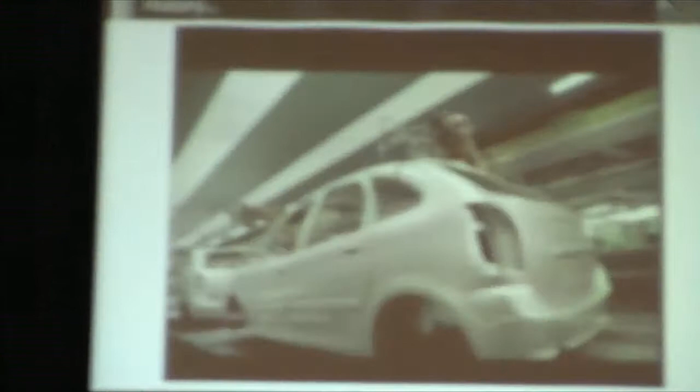Then, of course, we had the boom in robotics, the Industrial Revolution, or the second Industrial Revolution one might say, where robotic devices were introduced into the manufacturing process, and they were very successful. It was a very good marriage because the environment was very straightforward, very planned. The cars move forward always in a very organized fashion. One knows every time where every object has to be, so the robotic devices can be programmed exactly to move to the right point when required.

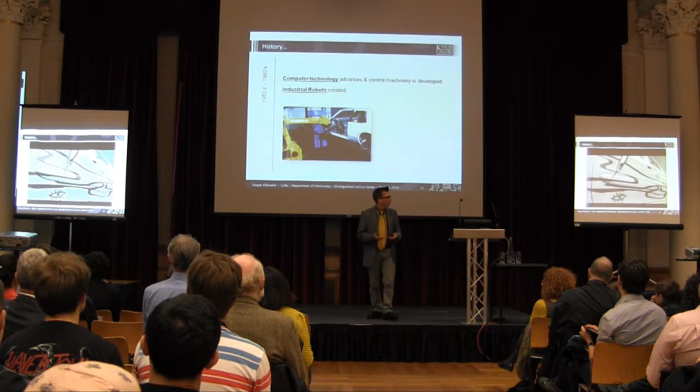I'm showing this video overlaid on the left and the right to again show that's not the way it is. These robotic devices, you might want to call them intelligent, work in the manufacturing industry, but they cannot do that. Here we get the impression that this robot is actually able to understand the human, is able possibly even to read his mind, and is a painter, painting a car, and then sneakily in the right moment erasing all traces again.

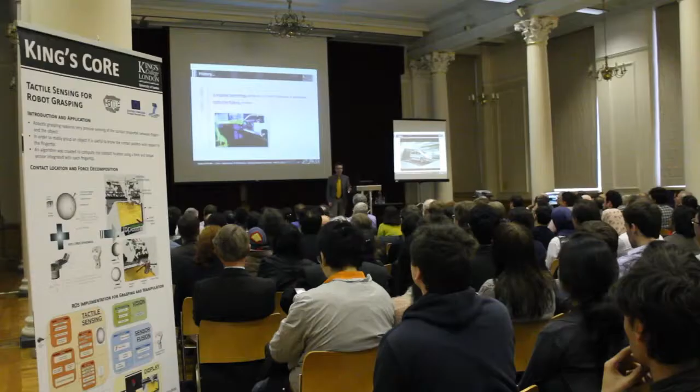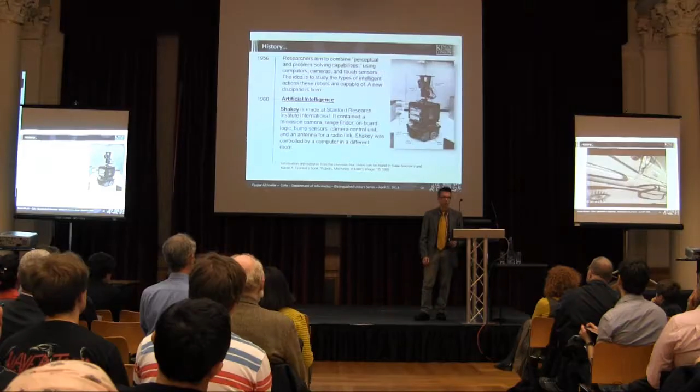So in order to achieve a video like this, either it has to be fully programmed step by step, or maybe it's all computer manipulated. The manufacturing industry is still working according to these earlier principles, like from the 50s and 60s. Everything is planned, and this way one can build cars.

But moving forward, there was then a move towards improving the intelligence of robotic devices—not only programming them step by step, but making them more intelligent. So artificial intelligence was introduced, and the first kind of robotic devices were developed. The idea was you take a computer, and the computer will do all the processing, possibly based on input that comes from sensors or other sources, and once the processing is done, the command will be sent to the robot.

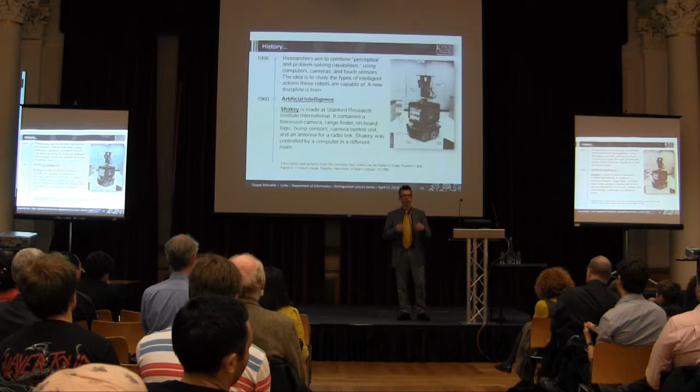So really, still really a complete planner, a complete decision-making process, completed and then executed. The problem is, if something goes wrong, if the environment changes, everything has to be planned again.

So there was then this new movement, very much supported or initiated by Rodney Brooks, who said, okay, we need simpler devices, robotic devices that have everything on board and that can react to the environment straight away. Instead of complicated models of the world, one should use the world straight away to carry out tasks. So simple robots, simple behaviors to be integrated in these devices, so that they could sense the environment and react to it, carrying tasks out.

And that comes under the heading of embodiment—trying to link the brain, this artificial brain, very closely with the sensors on one hand and the actuators on the other. So, simple behaviors. I want to show now a number of examples that illustrate this kind of concept.

Even in 1950, Alan Turing said, if you want to create a kind of artificial device that should behave like a human, then you should give it the best sensors you can, teach it like a child, and then you have the chance to actually develop this kind of intelligence. Rodney Brooks moved this a bit further and said, it's not just about speaking, but also about acting. So if you have a device integrated with all the sensors and actuators, and you let it loose in the environment, it will be able to learn, react, and do appropriate things in the environment.

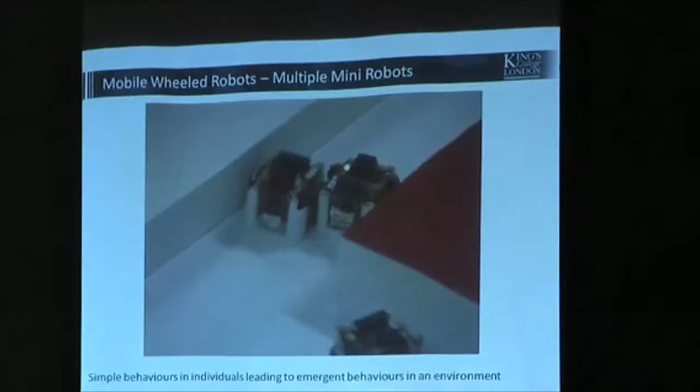So here on your left-hand side, simple behaviors like following your goal and avoiding obstacles actually create quite complex behavior if put into the environment and if the robots are in connection with others. On the other side, you saw behaviors like following a parent. So many things can be achieved with very simple behaviors.

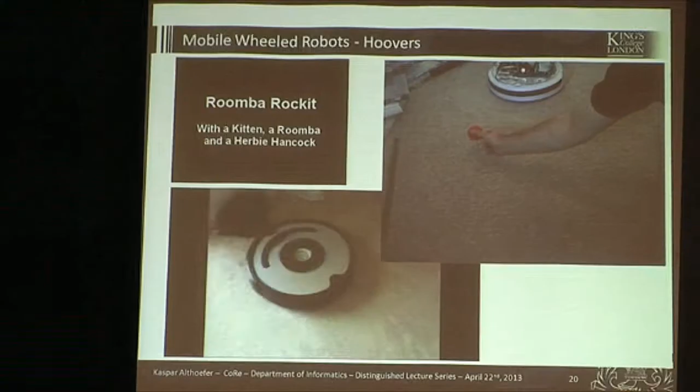Also, modern psychology recognizes that the brain is not just functioning by itself, but it is functioning also with respect to what the body is doing. So what your body is carrying out, what muscles are doing, that has feedback, has impact on your brain. I want to move on now and give more examples that underline the point even further.

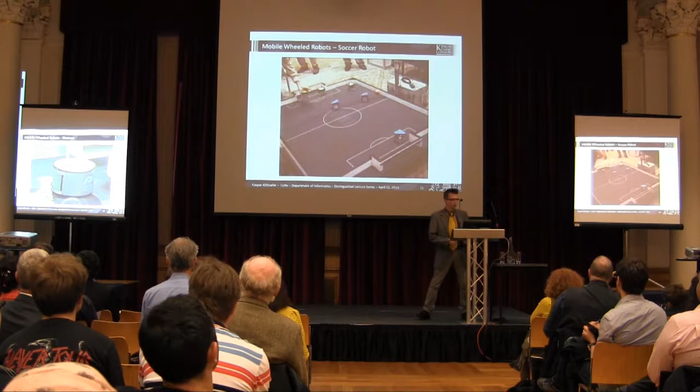So, for example, football, robot football, robot soccer. You can see here these robotic devices, they have simple behaviors built in, behaviors that are appropriate for football, so they have to defend, they have to attack, and they do sometimes very strange things - now they are just blocking each other, but it is appropriate in the environment because they keep the attacker away from the goal. Sometimes they have strange spinning maneuvers and you think what will this help, but occasionally it happens that the ball comes towards them and is then moved forward into the goal.

No goal in this game, unfortunately, but we have another set, a more modern approach to robo soccer. So we have slightly advanced robotic devices, they have slightly advanced behaviors, and they have also a leg now that they can use to actually shoot the ball, and very easily can score.

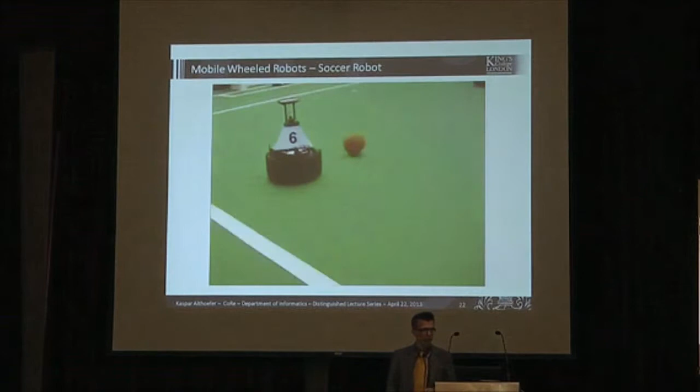I think in the first few sequences, a few goals are achieved very quickly, and you wonder what the goalkeeper is doing, but a bit later I think he wakes up and he's actually quite good in defending, as we can see here.

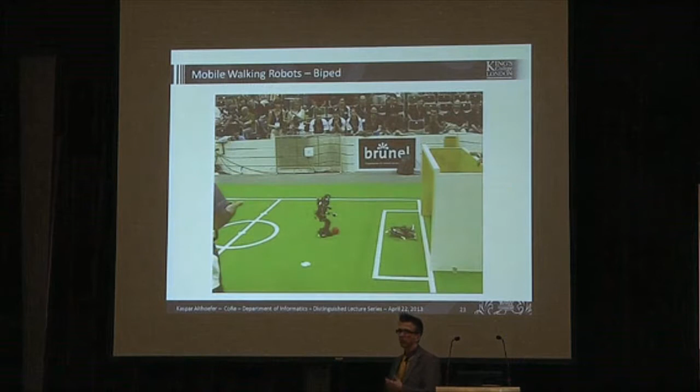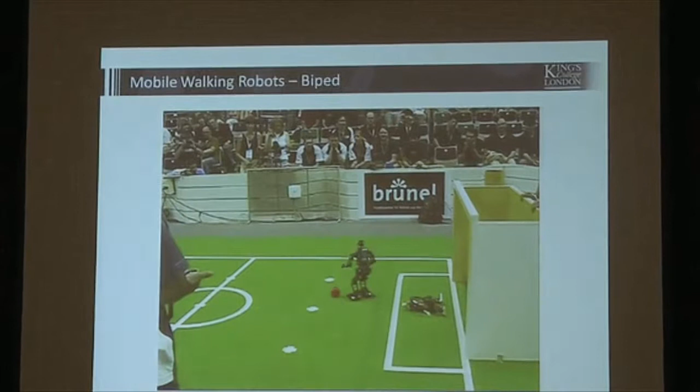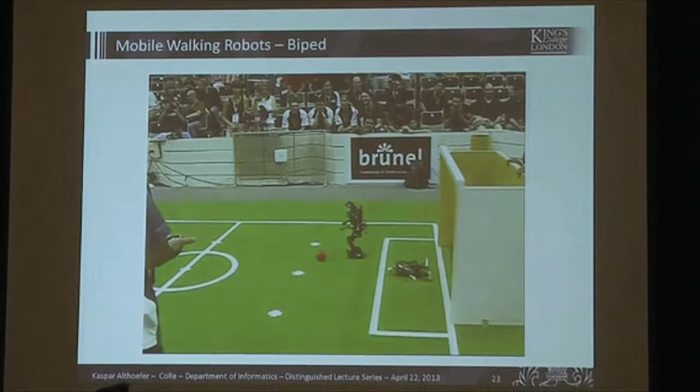Now, moving forward, what is happening there? So we have now even bipeds, two-legged robots that try to play football, and you wonder what's happening at first to the goalkeeper. Maybe that is part of the strategy, we don't know. But now watch the other player - he gets confused very easily, but the interesting thing is he always finds the ball again and orientates itself towards the ball and tries again to maneuver the ball into the goal.

You can also watch the people in the background, they are very tense now. And as you can see, the player is trying again, and he comes up with a very interesting solution.

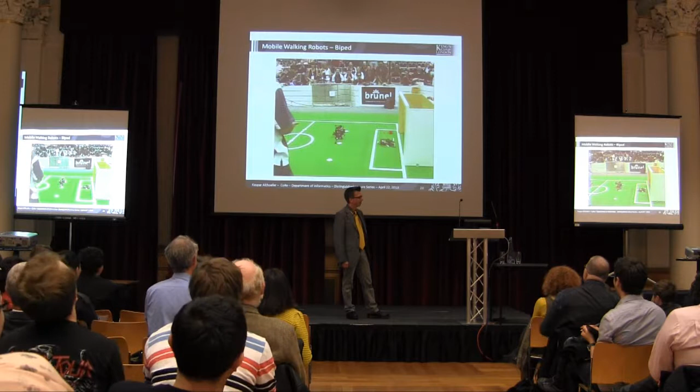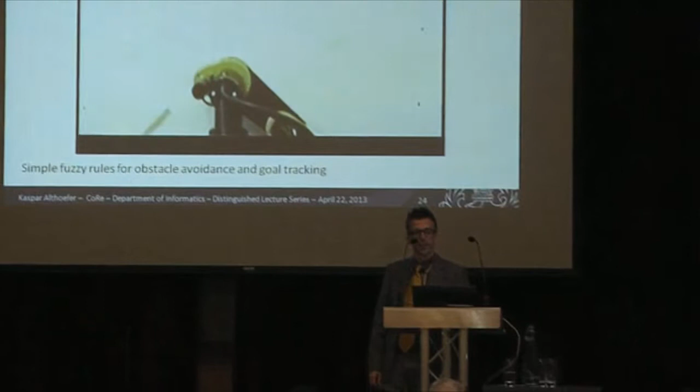Okay, so now I have the opportunity also to step back a bit to work that I have done here at King's actually 15 years ago, so this was part of my PhD. So trying to also take this idea further and to program simple behaviors into a manipulator.

So instead of - the idea was to move it a bit further and to use fuzzy control or fuzzy logic to describe these behaviors. So very simple behaviors like, if the obstacle is on the right, move to the left. If the obstacle is on the left, move to the right. If the goal is on the right, move to the right. So these kind of behaviors set up in a computer program were used to run this robot.

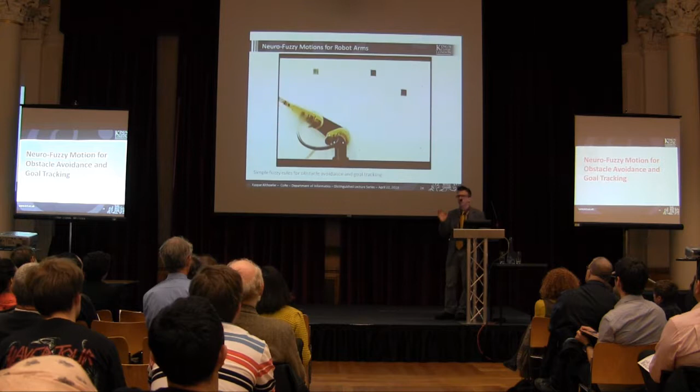So now I start this, and so you can see. The idea is for it to move to this position where it is now - that is the goal position. So it will move now to the start point, and these black squares are actually the obstacles. They're virtual obstacles in this case, so I assume I have a sensor that can sense them, and then this behavioral system actually ensures that the robot is always avoiding these obstacles.

So it's always trying towards the goal position, but whenever there is an obstacle in the way, it is moving away from it. And I think that was the first time that actually fuzzy logic was used for robot arms in such a way. So I think I show the same video again, maybe I move to the next one. And I hope that is the one I want to show now.

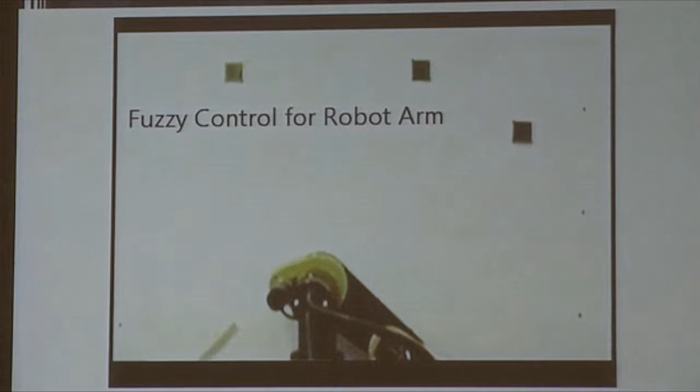So because there are issues, of course, with these very simple behaviors, generally, because you have only local knowledge, you don't have the global view. And if you had the global view, you could calculate everything and make sure you find a solution and get your robot to the end. But if you use a reactive system, if you have only local knowledge, then you might not get to the final point. And that's the wrong one.

I move forward. It's a bit tricky here. No, we don't want that one. Maybe this one here. Try.

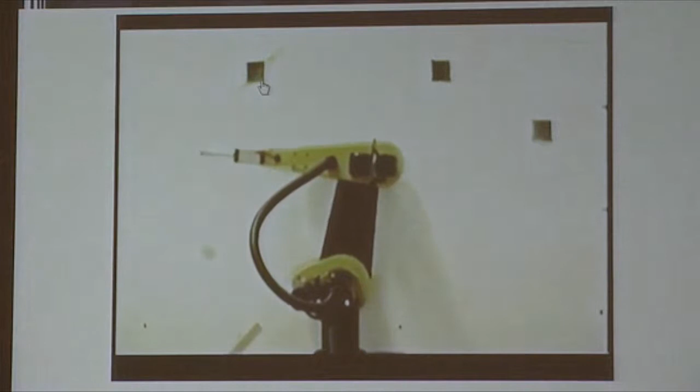I don't want to press it too often frantically. Now I want to reach the top point - you saw it, the robot arm goes to the top, trying to get to the goal position. The first link manages to get there, but the second link wants to go there too, while at the same time being repelled by this obstacle here. So it's kind of frozen in this constant movement, constantly trying. This is one of the disadvantages of these reactive, simple intelligence systems - they can react and move quickly in the environment, but they might fail at certain points.

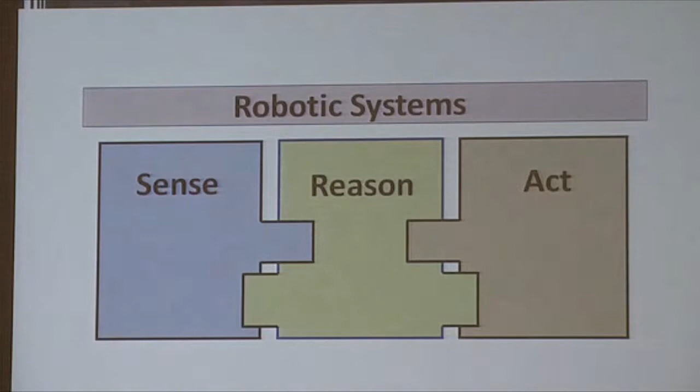I'll take my time, let me come back to this picture again. So that is kind of our embodied view of the robotic system.

I want to now look a bit more into the sensing side and also the acting side, starting with sensing and perception first.

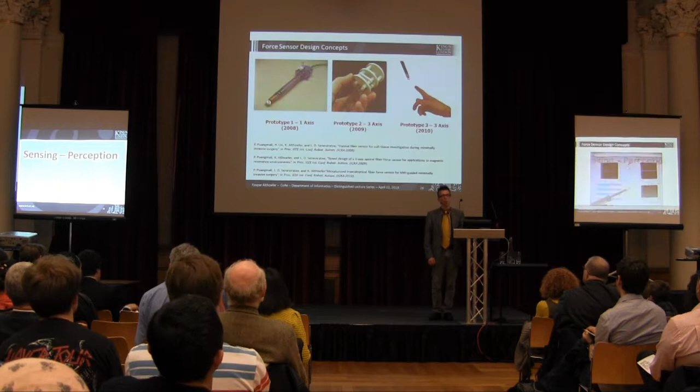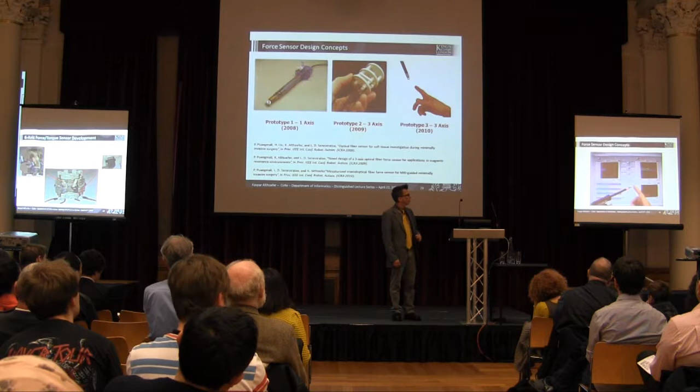We have worked quite a bit at King's in this area. We developed a number of force sensors - we were interested in sensing pressure and forces, and applied this to medical robotics quite a bit. As you can see on your right-hand side, one of these implementations, a prototype. When the finger applies some force to the tip of the sensor, you see the signal at the end. These sensing devices are essential for robotic tools and robotic systems.

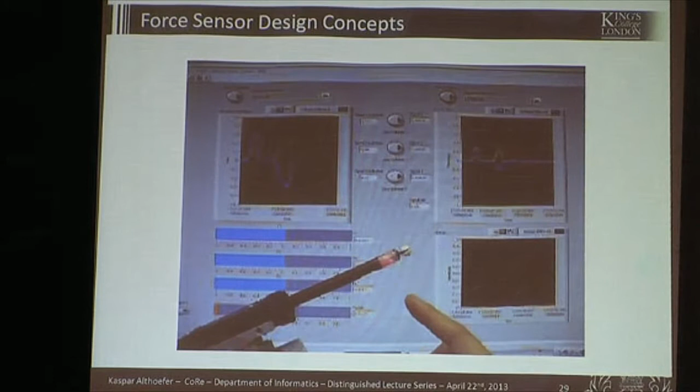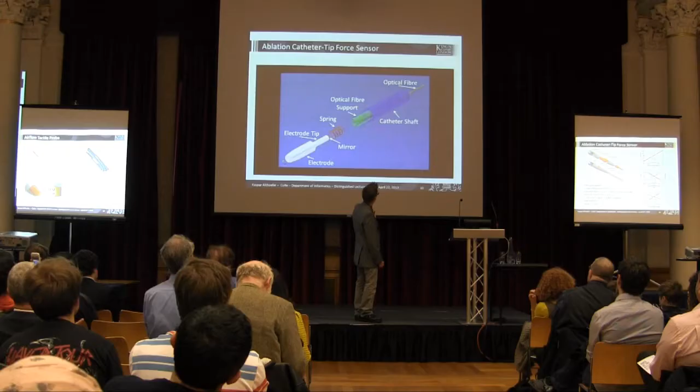We've developed quite a number of different sensing systems, and here on the right-hand side is a sensor which is more complex - it can actually measure forces applied in different directions. We've moved this further and implemented it into prototypes. Here in the center you can see a quick overview of how it works - we use fiber optic methods, and the sensors are integrated there, allowing us to measure forces applied at the tip.

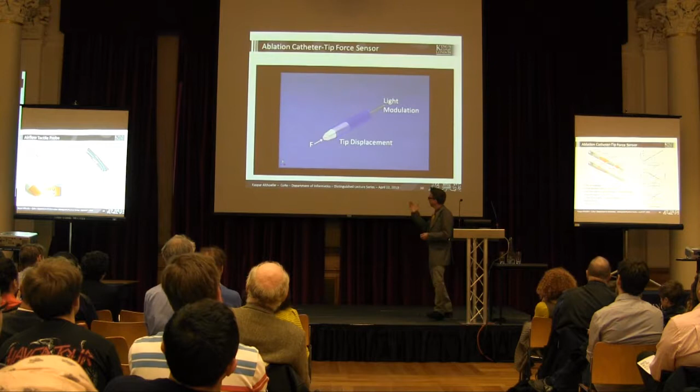We have used this inside catheters that can be used in medical operations, for example in a cardiac catheter. The input is given by a force, and we can see the result, the signal, on the screen. This allows us to have miniaturized sensors that can be integrated in such devices. We've developed cardiac robotic devices that effectively work like a catheter and can be inserted in the heart. We'll have the opportunity to see this later at the stand in more detail.

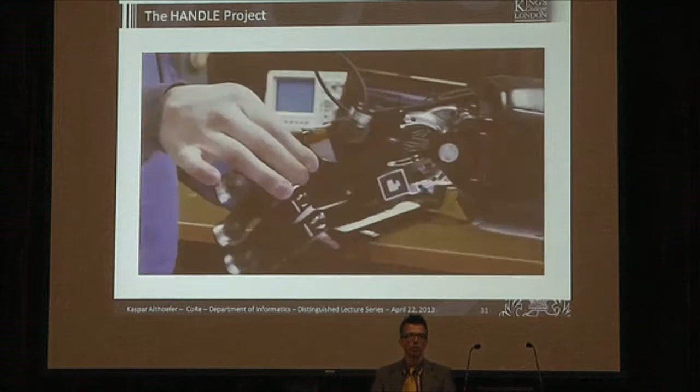I'd like to also mention the Handle project that just concluded very shortly. There at King's we were very much involved in developing sensing and perception, but it was a multi-partner project, and the idea was to develop articulated hands, very much based on the shadow hand - it's nice that Nick Singer is here today from Shadow. We integrated sensing devices to equip this robotic hand with a sense of touch in order for it to grasp and handle delicate objects as required.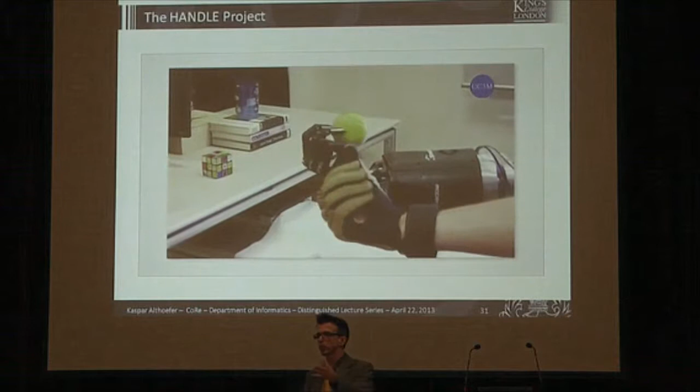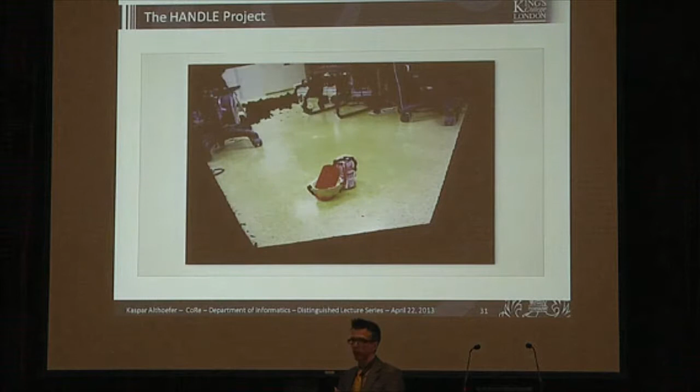This was combined with an approach to actually sense the wider environment. We used a Kinect in this case to identify obstacles and objects in the environment, so that this robotic hand can go into the environment, recognize the objects, and know where to grasp. Then once the grasping is happening, we can switch over to our tactile sensors and allow the object to be handled in an appropriate way.

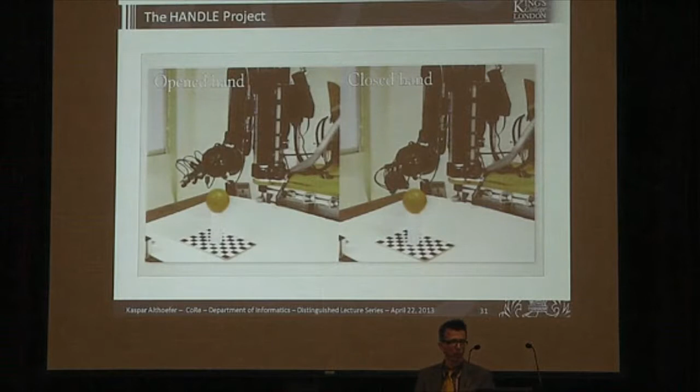That brings me now to intelligent mechanisms. I looked at the sensing and perception side, now I move over to mechanisms - these are things attached to the robot, the legs or the hands, to operate in different environments. I've looked at a number of points there: locomotion, articulated hands, and work happening here at King's on metamorphism. I'd like to mention this context as well.

But first, looking at some walking systems. We have here the Honda system, which was introduced quite a while ago, and although it does the job quite well, it needs to be on fairly flat ground and isn't so happy with stairs, for example. On the other hand, we have here a more modern system on the other side.

So that is the Boston Dynamics system. This fits: here we have a system that is dynamically very stable. It can very nicely interact with the environment, automatically adapt to it, and even manage to climb stairs very nicely. These robots are always on a harness, but usually this harness is only there to hold it if it should fall.

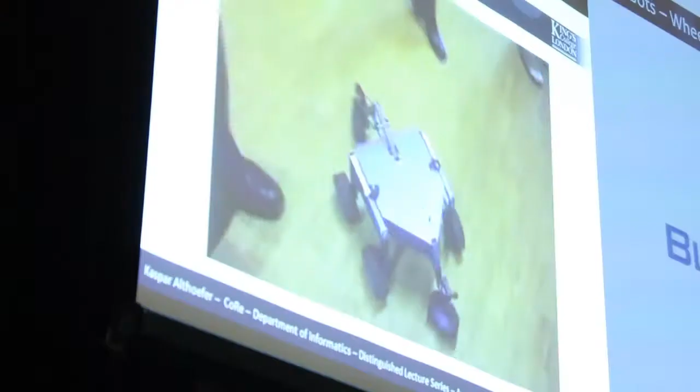I think another nice example of an intelligent mechanism is a system I saw for the first time around 10 years ago. The video on the left is one I took at a conference, I think in Lausanne, if I'm not mistaken. This is a wheeled robot, but it's not just wheels attached to the platform. As you can see, the robot is actually able to climb steps that are bigger, higher, than itself. Okay, the video stopped at this point, so maybe we can continue.

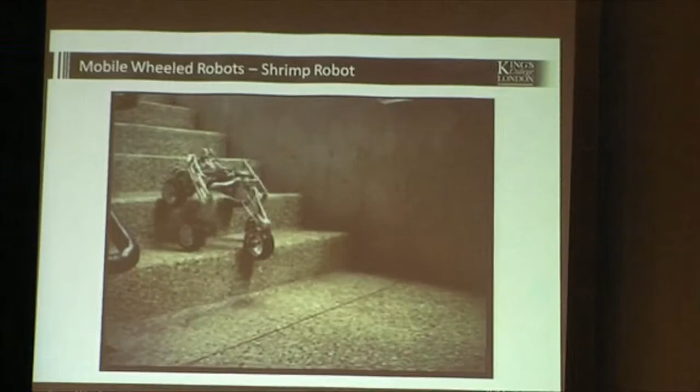So there's a good example now. The system can fold around the steps, overcoming them in an intelligent way, and the operator is just using a joystick to move it forward. The operator doesn't need to care about adjusting the legs; that happens automatically.

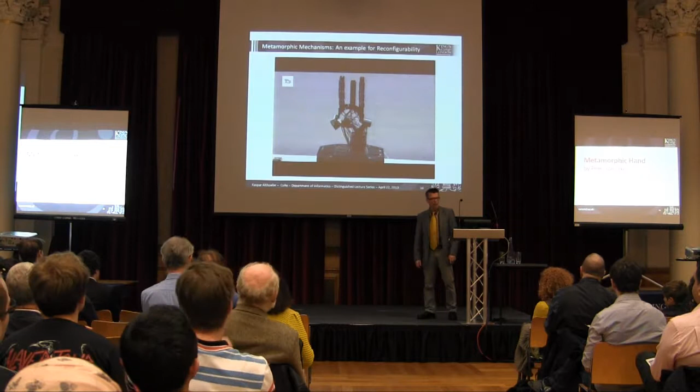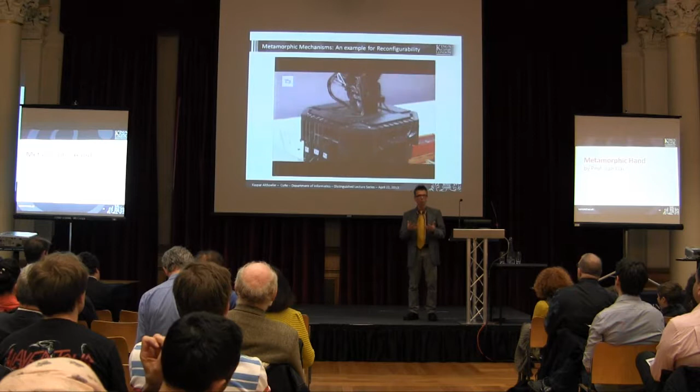It's a pity that this one doesn't come. No, it doesn't matter, let's hope the next video comes, because this is work done by my colleague Professor Jian Dai. He's also working on very intelligent mechanisms, one of them being the metamorphic hand he created. It can operate more or less like a human hand, but in addition it can fold, moving into other states or configurations. It could be used, for example, in a medical context where you might want to fold a hand, insert it into a patient, unfold it again, and then carry out the required operation.

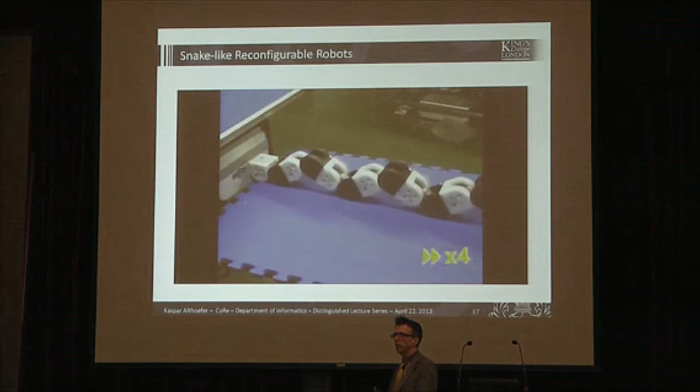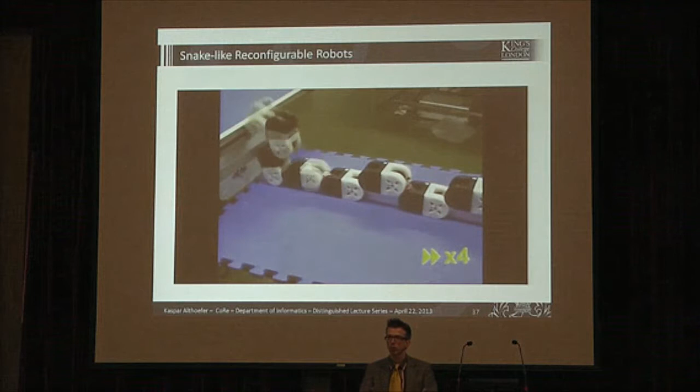And that is another nice example of reconfiguration: a robot that can change its shape, reconfiguring itself into different types of robots. As you can see, from something that was some kind of strange robot, it turns into a snake and moves in a certain way. It might change itself back into another robot and even walk around. So that is reconfiguration in robots.

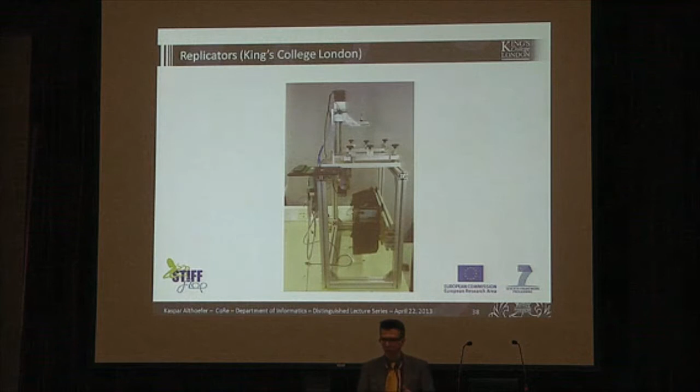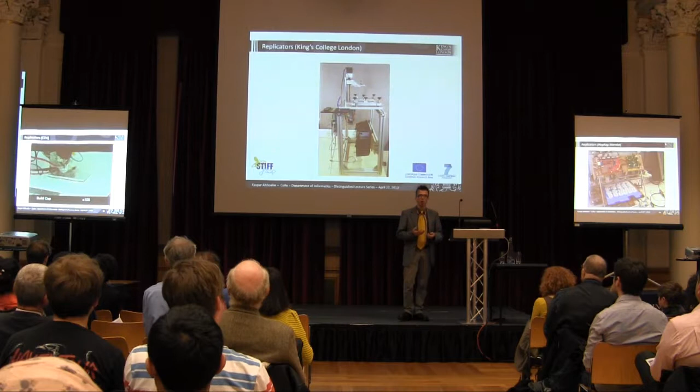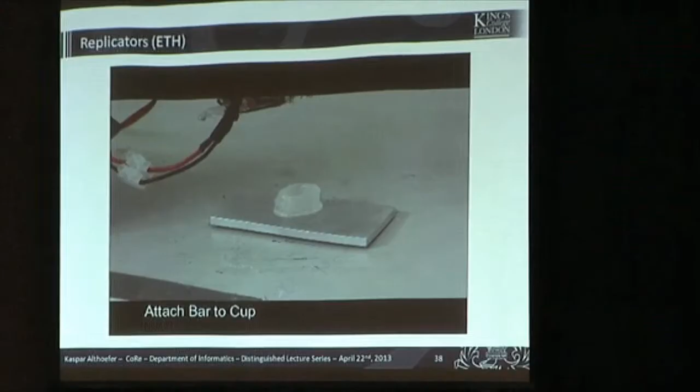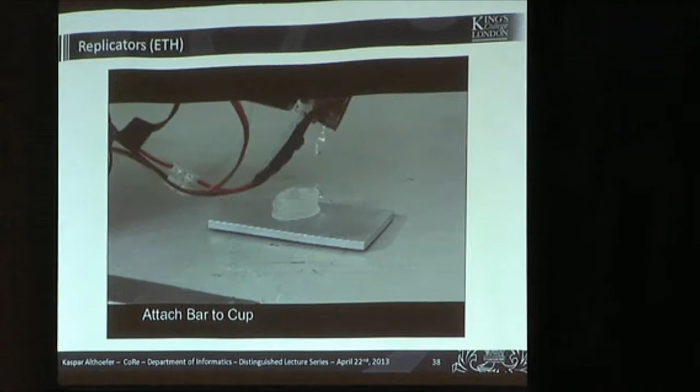I want to move to the next one, and I'm not too sure whether this is exactly the right place to show it, because here we look at replication and self-replication—in a way, a very intelligent mechanism capable of creating itself again. On the right-hand side is a rapid prototyping machine that is actually printing parts which can be used again for a new rapid prototyping machine. Similarly, on the left-hand side, a robot is creating a tool by itself, again using a rapid prototyping approach, creating a small spoon and then using it, attaching it to the end bit, and moving around to carry things from one point to another. So it's capable of extending itself.

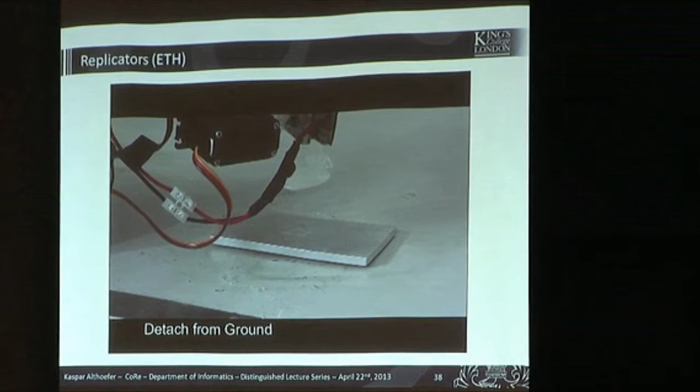The interesting thing is to explore the idea of robots that can either extend themselves or even replicate and reproduce themselves, if you want. As you can see here, the robot is picking up water from one side and bringing it to the other. It has created a tool by itself. We are also working on this concept here at King's, and you will hopefully later have the opportunity to look at our rapid prototyping machine.

And that gives me now the opportunity to move to my next section, the inspiration from biology. That is another way of improving the intelligence in robotic systems: to study biology, to study animals, to get ideas from nature and incorporate them into robotic devices.

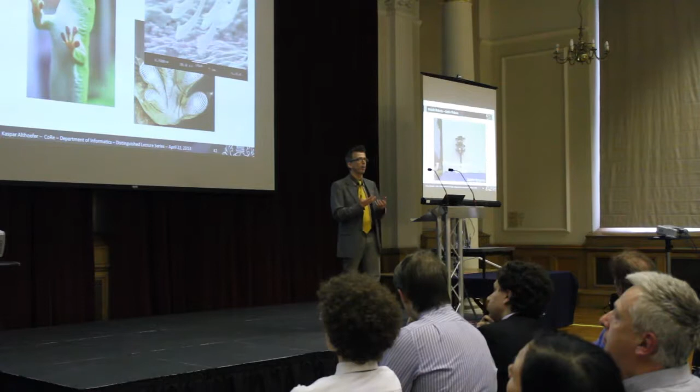Another good example of biological inspiration is this gecko robot, developed based on the way geckos make use of their fingertips to attach themselves to surfaces and crawl up walls. Not only were the ideas of how the paws are built taken, but also the motion behavior was studied and incorporated into the robotic device to create one that is successful at climbing up walls, as we can see in these two examples.

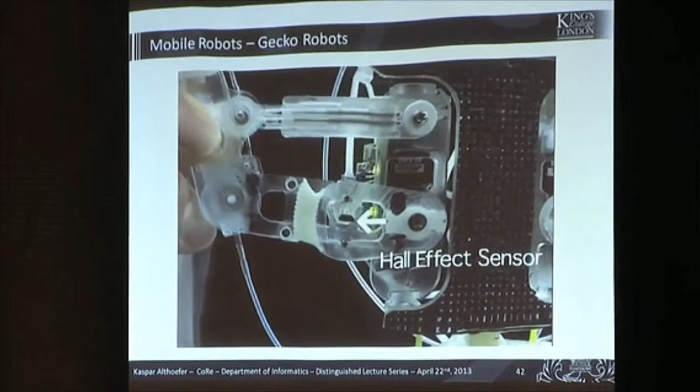If we could create robotic devices based on these principles, that would be very interesting, and that is something currently happening. We are collaborating with researchers from, among others, Pisa - the SSSA group - and they have studied the octopus in detail and created devices taking inspiration, so flexible, soft devices.

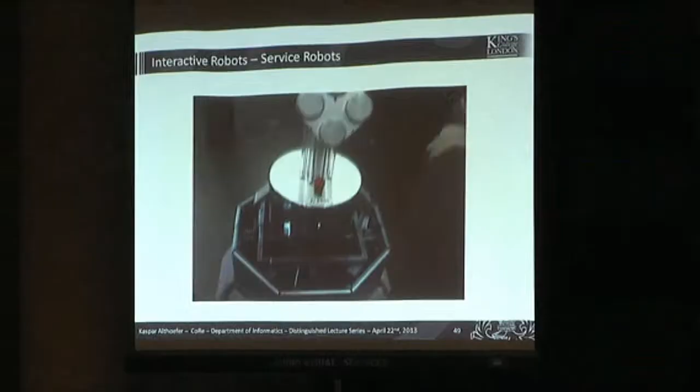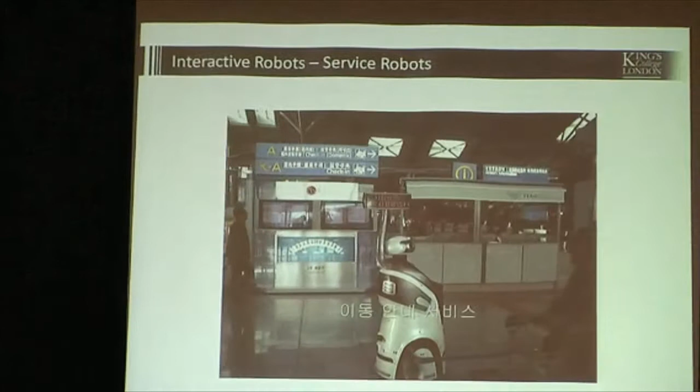That's one on the left-hand side, a simple robot with some capability of communicating with humans. It could be used in museums to guide people from one place to another. On the right-hand side is a more modern version, where the idea is for the human to type questions in, and the robot responds and guides them in the right direction.

There have been a number of developments. This is an earlier system which I saw, I think in 2002, and I took a video of it. Here the idea is for the robot to somehow interact and respond to the person, but very simply, so it's not clear where the system is looking.

There have been quite some advances over time. I want to talk about a few that have been developed. Maybe first, on the left-hand side, is Inkha, our robot here at King's, the King's receptionist. Inkha is female, so I can say her in this case, at least that's what the constructor, the inventor, said - a female robot. I don't know why they had this idea. But this robot now has cameras built in, so it can recognize the movements of the person, and one can communicate through a keyboard and receive the answer from the system.

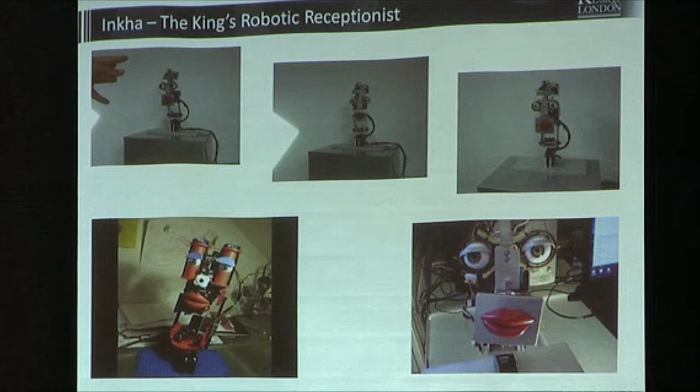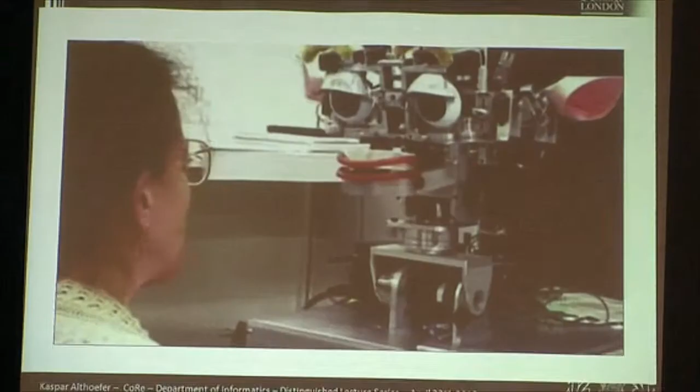Here on the right-hand side is Kismet, from Massachusetts Institute of Technology, or MIT for short. The idea here is to move forward a bit and try to understand the expressions of people and mimic them in a robotic device. As you can see, the system can express different emotions, can really follow the person, and you can create this interaction very nicely between the human and the robot.

The same group, Hanson Robotics, have developed this robot here, which really looks like a human. This video you can find on YouTube as well. You have the impression the robot is really communicating with this person. There's really a dialogue, and the reporter is extremely happy from the answers. It seems really there is a dialogue between the two.

Now the question is, is that intelligence? Or is this just another program sitting inside this robotic device that, true, looks very human, but is this device now really thinking, or are we just getting the impression that this device is thinking like a human?

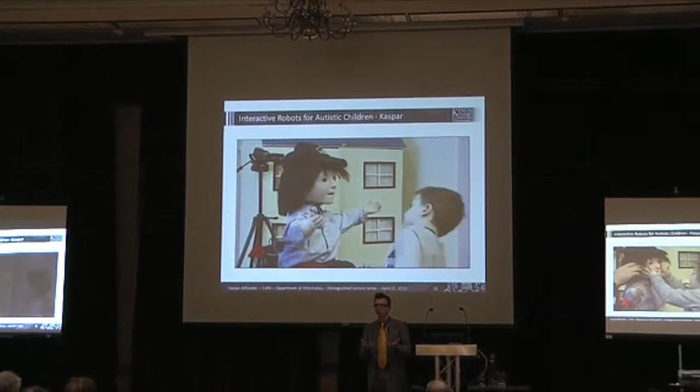It's also a step further compared to the other robots because it can react to tactile input, so the child is allowed to touch it, to play with it, and it will react. The idea is to use this robot to really teach the child, to calm the child down, and to help the child through this process. When one has a very predictable way of doing it, we can program the robot to react as needed for a certain situation for the child to learn something.

So it's not so much about whether we're fooled by the intelligence, but really using these kinds of concepts to improve interaction between robots and humans.

It repeats the task and possibly adapts to changes in the environment. And it looks very intelligent - like a child looking at these things and trying to understand them. Is it intelligence? That's the question, of course.

Now I want to step away from that and quickly look at some other aspects of robots - an area where robots had some impact: robots in the arts. This brings me back to something I experienced as a child, which maybe influenced my choice in later life, who knows.

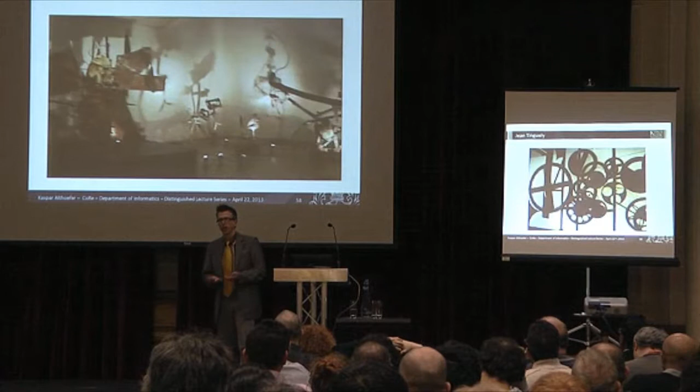Thanks to my parents, I was exposed to an artist called Jean Tinguely, who created crazy machines that moved around in a crazy, very noisy way. My father told me - I had forgotten - that we actually destroyed one of the machines.

So we went to this museum. Usually you go to a museum and it's just pictures, it's boring. But suddenly you go there and you can press a button and something is moving, making a noise. So we did it all the time, pressing the button until it was broken. But nobody complained because at least it was quiet afterwards.

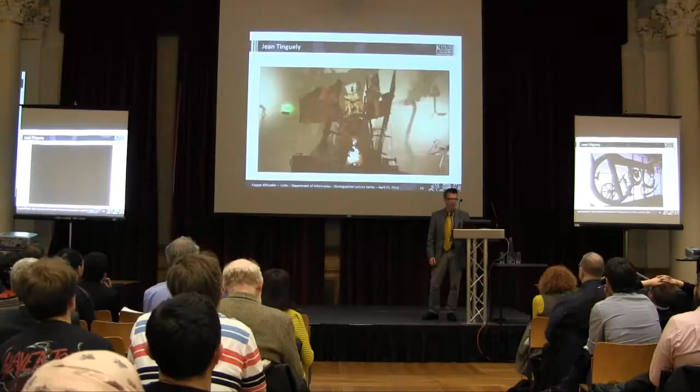Anyway, these are robotic devices in my eyes, and they're used in art to show movement and also self-destruction.

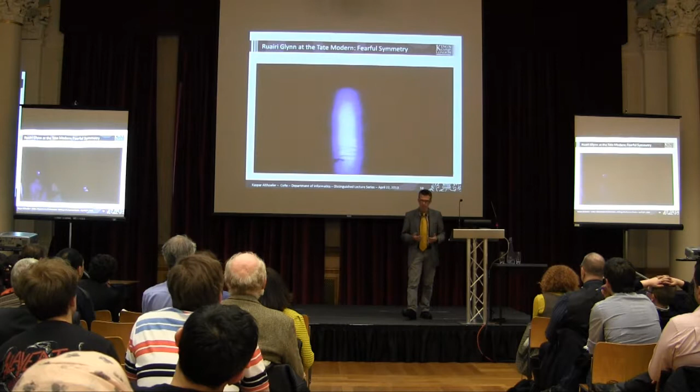I was also very pleased to be part of a robotic art exhibition. Ruairi Glynn from UCL organized and created Fearful Symmetry, a huge Delta robot mounted in Tate Modern, in the new parts of Tate Modern, which moved around over the guests and followed them around - effectively trying to show a higher intelligence hovering over the people, understanding them and following them. I was very happy to be part of this one.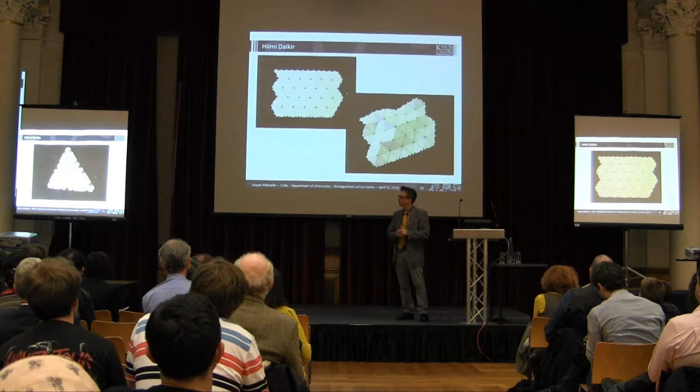I'd also like to highlight this project by one of our current MSc students, who looks at the concept of reconfigurability and applies it to architecture. He's an architect from his first degree, and he's creating walls that can fold, change shape, be moved into any kind of configuration, and even folded away if necessary. Imagine such walls integrated with motors so they could do this automatically and adapt to environments.

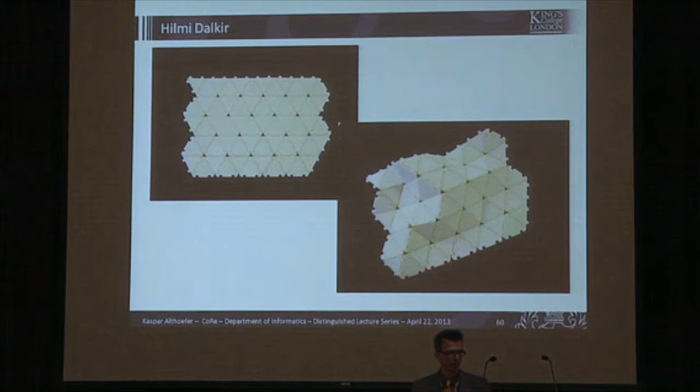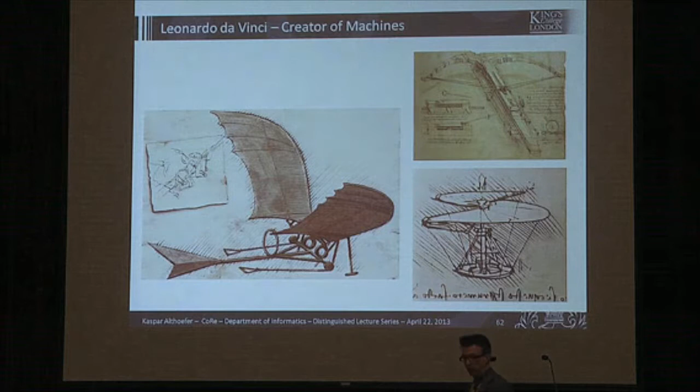Obviously, Leonardo da Vinci should be mentioned as well if we talk about arts. He was definitely a genius, creating a number of very interesting devices and machines, such as flying machines or military machines. He was also very interested in medicine, having an impact there as well.

I also found out that he actually created a robot, now 500 years ago. This robotic device has been rebuilt based on his drawings, and it could show it was capable of recreating human-like motions - it could sit up, move around, move the arms, move the neck, and even move the jaw.

That's now my opportunity to move on to the next section, medical robotics. I'll explain in a minute why I go into medical robotics, but first, why is there a link? Well, a company in the States, Intuitive Surgical, recognized the qualities of Da Vinci, and they called their surgical systems the Da Vinci system.

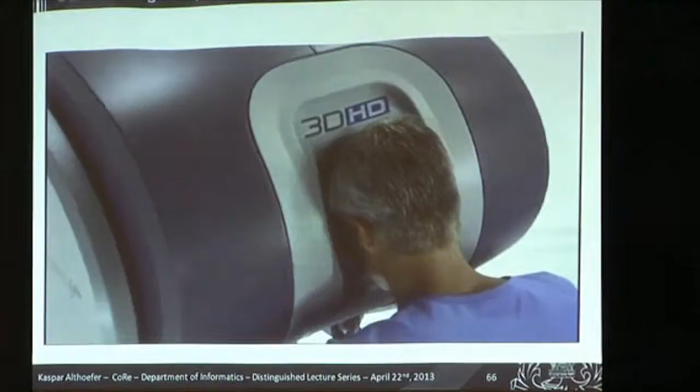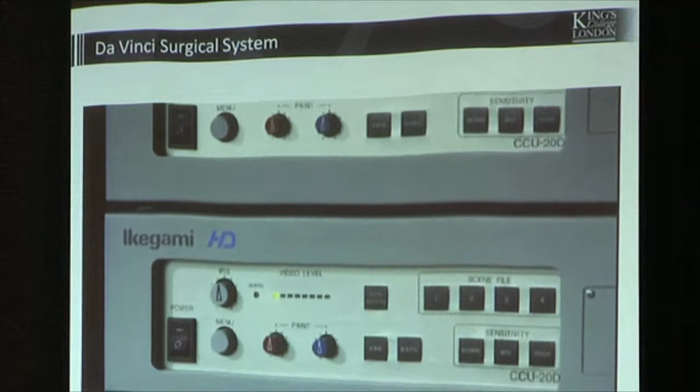The Da Vinci system is a robotic device - I'd say state-of-the-art, a really fantastic system - used in minimally invasive or keyhole surgery. Now, why is intelligence important there? If we look carefully, we can see this robotic device is actually tele-operated: somebody with a joystick, a surgeon, moves the different robot arms and carries out the operation. So, if you will, it's another 'dumb' robot that's been created.

I have to admit they've integrated some nice features. For example, they've made the movements very intuitive, making it easier for the surgeon to carry out these kinds of operations.

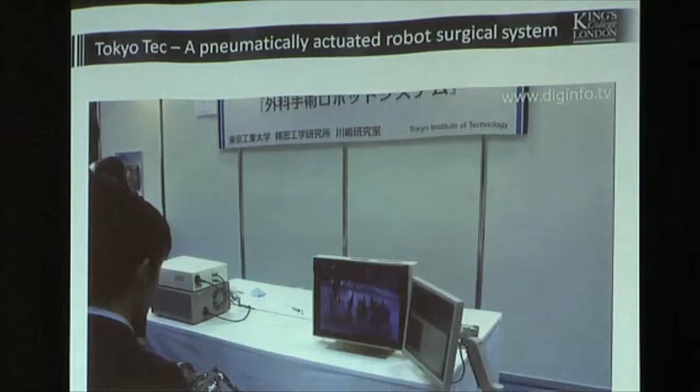I don't want to linger too much on these images, just give a quick overview of a number of other robotic devices that have been developed. Here on the left-hand side is Tokyo Tech again, and they have a pneumatic system that allows them to provide some haptic feedback, some force feedback to a surgeon, something that's missing from most other devices developed at other institutes like DLR, for example.

On the right-hand side, we have a system called Raven in the States. The interesting thing there is it is an open source project, so people can provide ideas and help building the system.

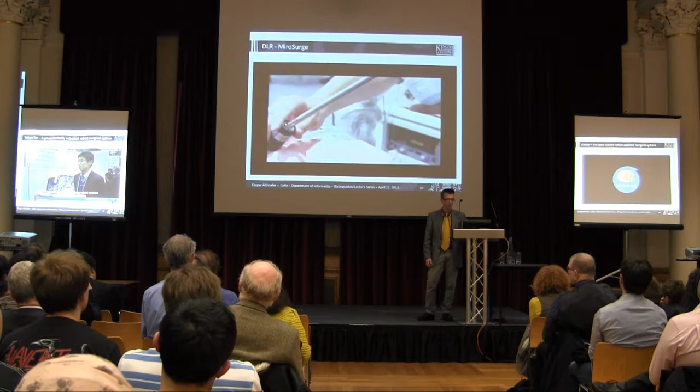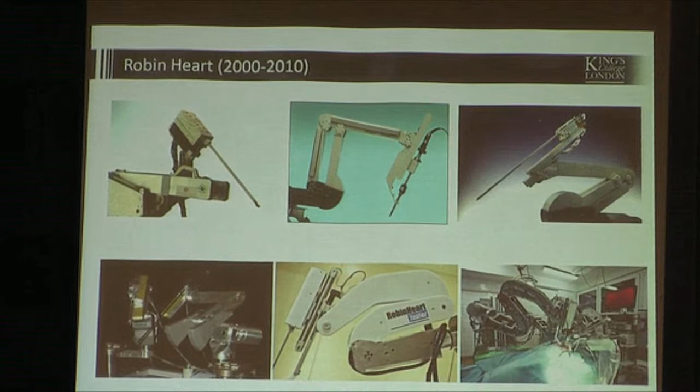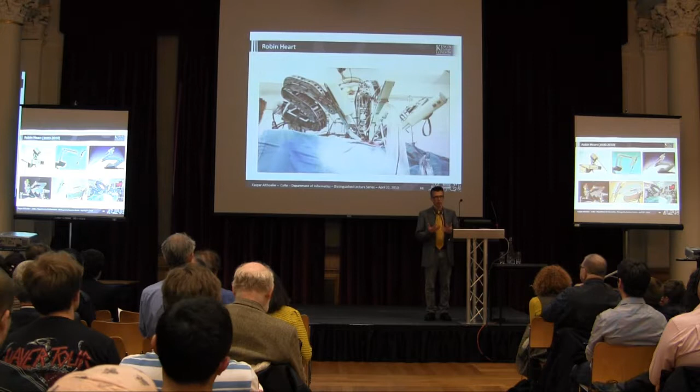Very quickly, similar projects run also in Europe. We are collaborating with a group in Poland, and they have developed a Robin Heart project, where they develop a number of different devices. They are interested in creating those devices, but at the same time also explore how to bring back haptic feedback to the user, so that the surgeon can not only see what they're doing through the cameras, but also feel what is happening when their devices move inside the body and carry out operations.

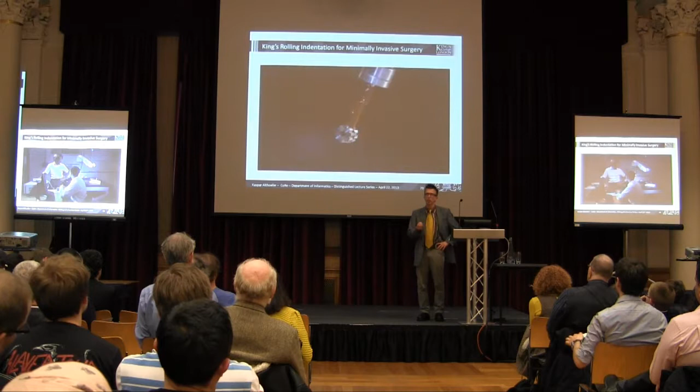But I want to now also move to the work that we are doing here at King's. We are also very interested in this idea of measuring forces, as I said earlier. So we have developed these palpation devices, where the robotic device is palpating the organ, applying forces to it, and at the same time we measure the indentation. Through this, we can identify the stiffness at various points of the organ.

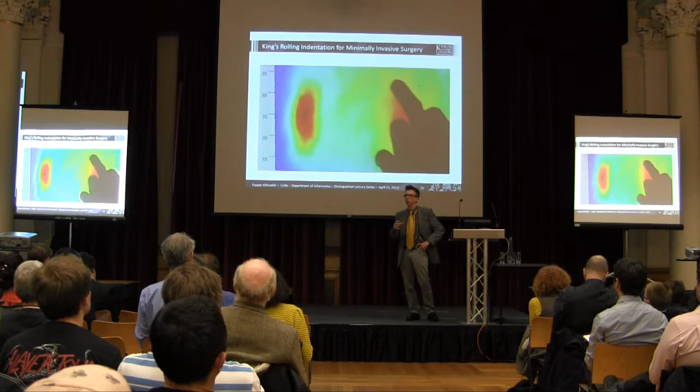We actually roll over the organs. There's a simulated organ here, not a real one. And then we can get information like this back, where we can see where the organ is more stiff, in which areas. That gives us an indication of where the tumor sits, which will hopefully be helpful for surgeons to cut out the right pieces and leave the healthy pieces behind.

We have developed this further, with a number of techniques to improve how the information is fed back to the surgeon. We have worked very much on a concept called pseudo-haptics, where we want to try to trick the human into believing certain things that are actually not happening. So visually representing forces, ideally created in such a way that surgeons believe they're feeling the forces even though they only see it.

But you will have the opportunity later to try it out yourself, so I will move quickly over these slides, and you can tell me whether you can feel something even when you only see something.

That brings me now to one of the last slides. STIFF-FLOP is a medical robotics project that we started a year ago, really trying to bring all the things together here. We are keen to incorporate our sensing and perception know-how, integrate our actuation know-how, and of course create intelligent systems.

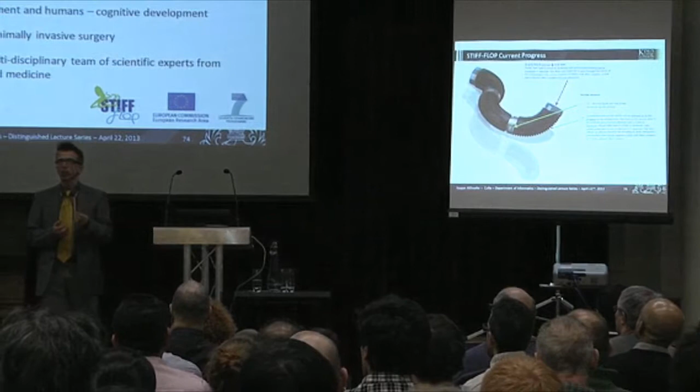One of the really interesting things is that this robotic device is planned to be like an octopus arm, so not a rigid device like the ones we have seen beforehand at other places, but ideally a robot arm that can be squeezed, be soft, easily inserted into a patient, and then stretch out and become rigid to carry out certain operations. We are very keen on this idea of creating a soft robotic device and integrating our sensing methods and a certain intelligence to carry out operations.

Autonomously. So here we have one of our sensors, a stiffness sensor that can be integrated with this kind of robotic soft arm to measure how stiff it is at various points.

Good, and that is the end of the first part of my presentation. I've spoken quite a bit about robotics systems, intelligence, sensing, and actuation, and I've also shown quite a bit of the work that we have done here at King's. But I really have to say this is not a one-man job that can only be done with the help of others.

I want to give my thanks to all my colleagues, past and present members of King's College, who have really helped to move the research forward here and helped bring it to the level we are at. At first I thought I would put a list of names, but it would have been too big and I would probably have forgotten some. So generally, thanks to those who have contributed, including PhD students, research assistants, research fellows, members of staff, academic, administrative, technical support. Without them it wouldn't work.